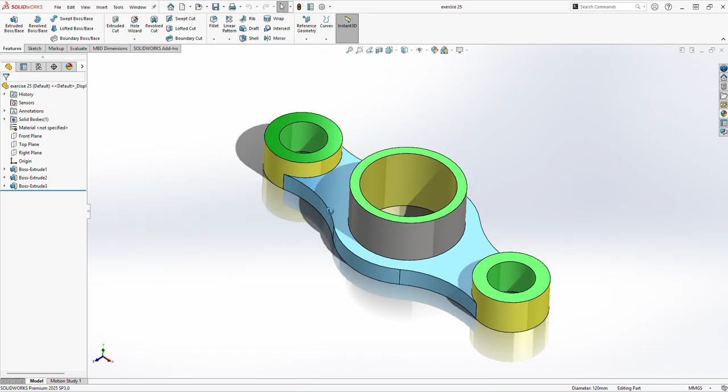I am Guru and in today's SOLIDWORKS tutorial we are going to model this 3D engineering component step by step. Looking at the drawing for exercise 25, this part features a central cylindrical hub, symmetric outer bosses and smooth connecting fillets. We will start by sketching the top view profile using the main dimensions including 150 mm center to center distance, and then we will use extrude boss base and cuts to establish the varying heights ranging from 20 mm base plate to 70 mm central cylinder.

Whether you are a beginner looking to improve your blueprint reading skills or an advanced user practicing parametric modeling, this exercise is perfect for mastering sketch relations and section views.

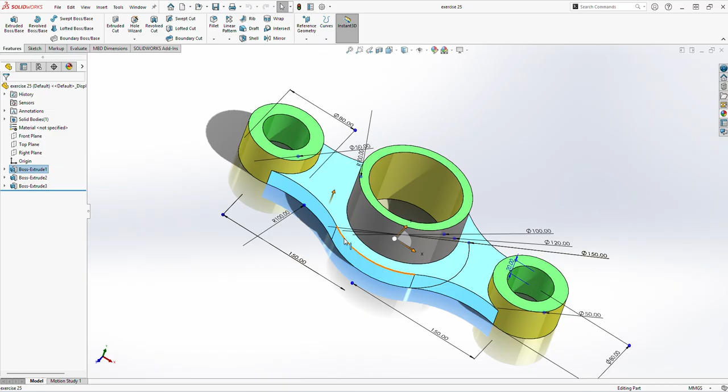So we can close this exercise for starting from a sketch. Now we close the exercise and start from a sketch, then go to a sketch and select any circle and take any plane like front plane, top plane, right plane. Today we are going from right plane. Create circles here, and the third circle, make the dimensions.

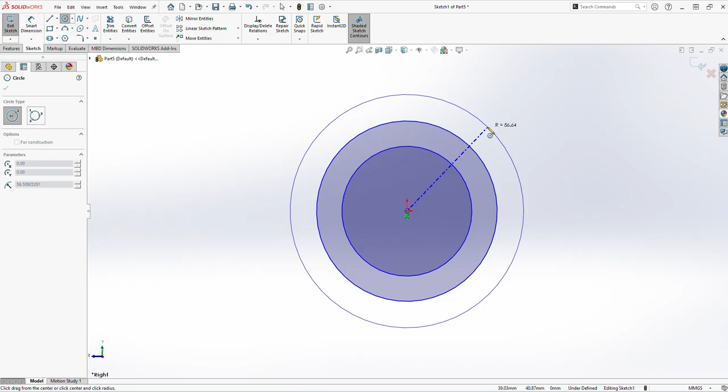First one is 100 mm, this one is 120 mm, and this last is 150 mm. Create some reference line for creating other circles. For construction and midpoint line. Select for construction and select here.

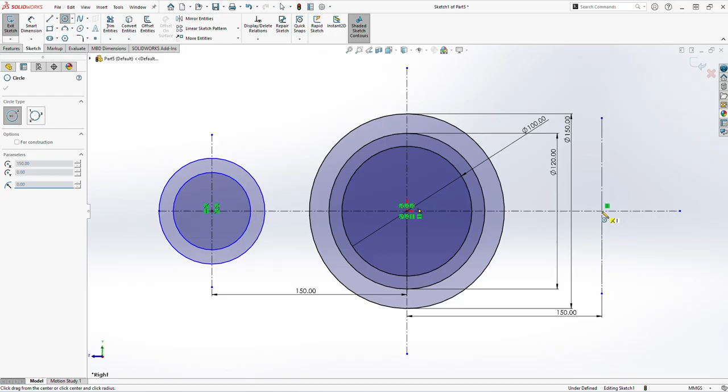Make it for construction. Go to smart dimension and measure it for 150 mm. And create two circles at this point. Make the dimensions of the circles 50 mm and 80 mm.

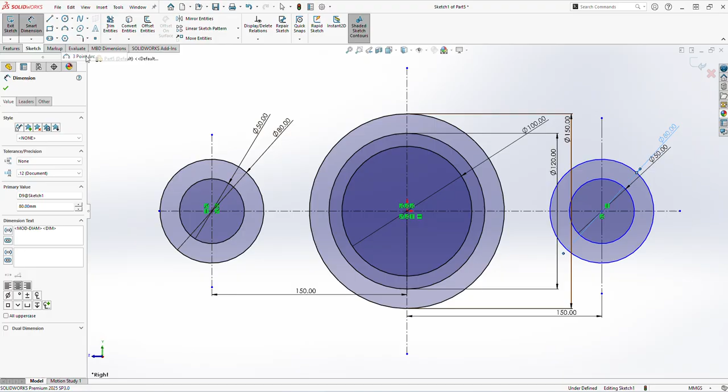Create a 3-point arc at this point. Make this radius 100 mm. Close this dimension tab and select these two lines with the control button and make it tangent. Select also this and make it tangent.

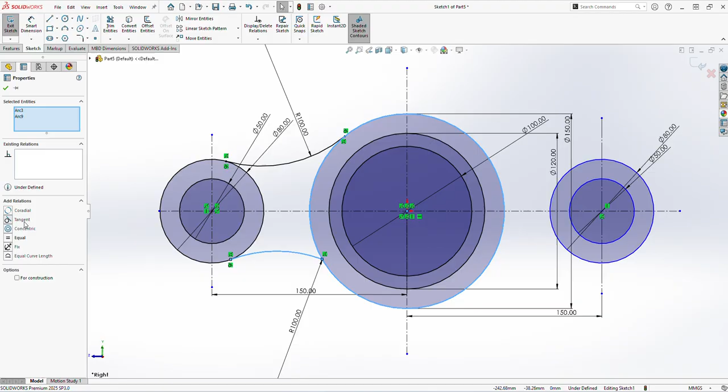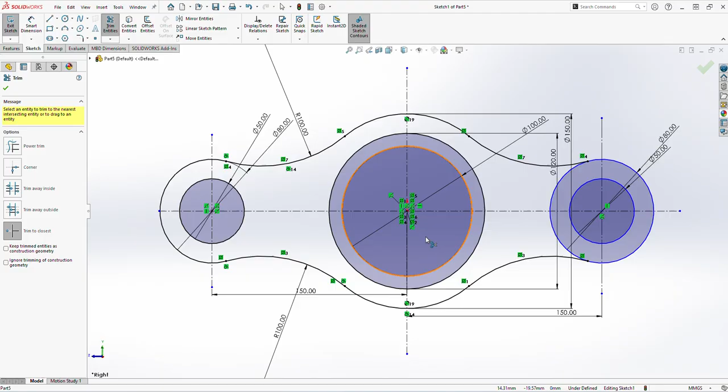So you can see here these lines are verified, and now we can mirror these entities to here. So we can select mirror entities and select these entities and mirror about, select this line and click OK. Trim some entities which are not required like this. Sorry guys, here these lines are required. Trim entities and trim these lines only.

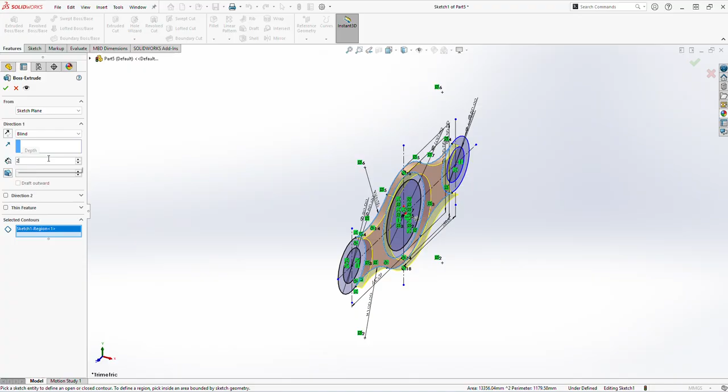Click OK. Go to Features tab, select Extrude Boss Base and extrude this profile up to 20 mm. Go to this boss base and arrow button, click here sketch, and go to extrude boss base, select this sketch and delete this region, select this region and select these contours and extrude it up to 40 mm.

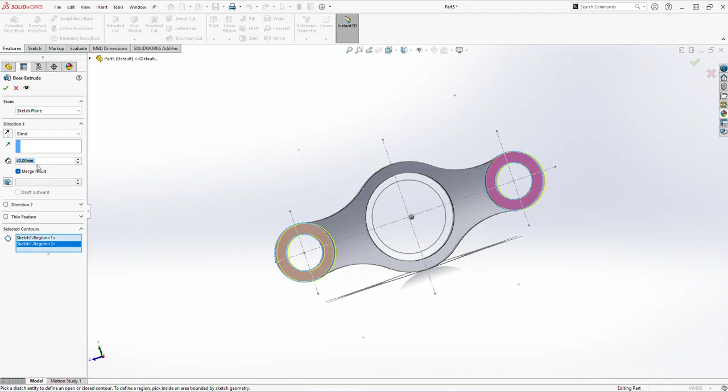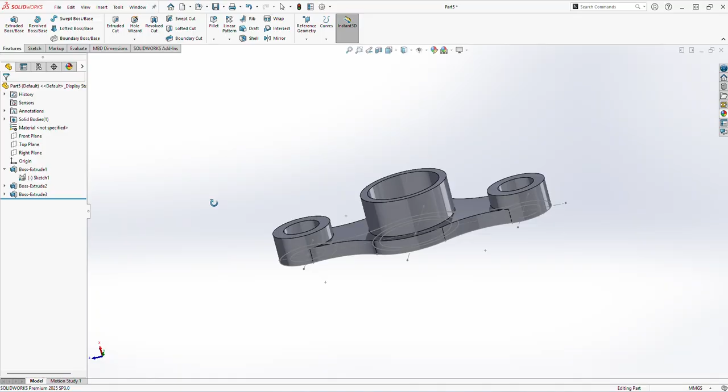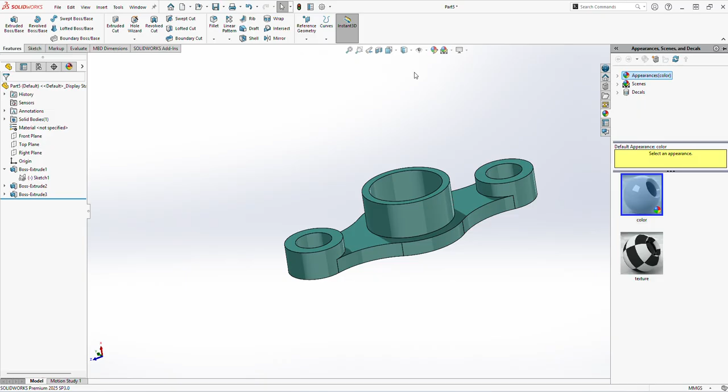Select this line. First one, delete this, clear selection and select this profile and extrude it up to 70 mm. Here all the parameters are done. You can see here the exercise is complete, and that wraps the exercise 25 in SolidWorks, and we can color it from this. Select OK. Select plain white for better preview.

By breaking down the blueprint into clearer steps, starting with the main center lines, extruding the different boss levels and finishing with those smooth tangent fillets, we easily transform this 2D section drawing into a clean 3D model.